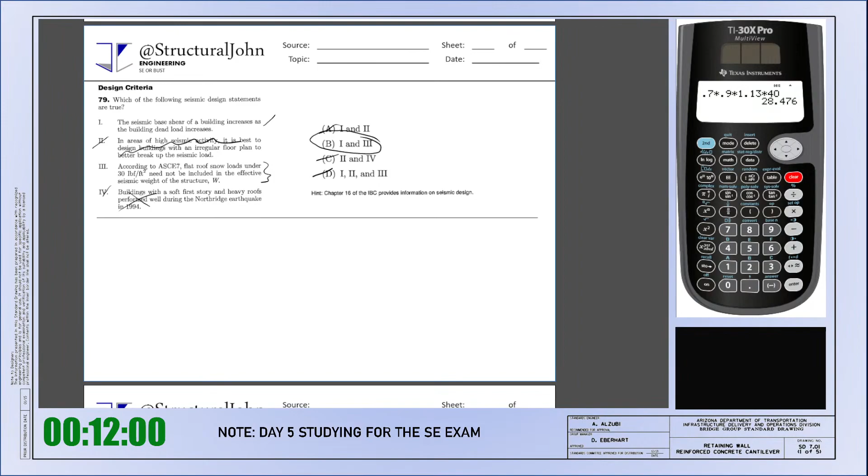We got 2 problems today. I already finished them, I think it was Friday, and today we're gonna go through them and see what I did wrong. And I most likely did something wrong.

Sebastian will not be joining us. That's my cat. He is currently taking a nap. All right.

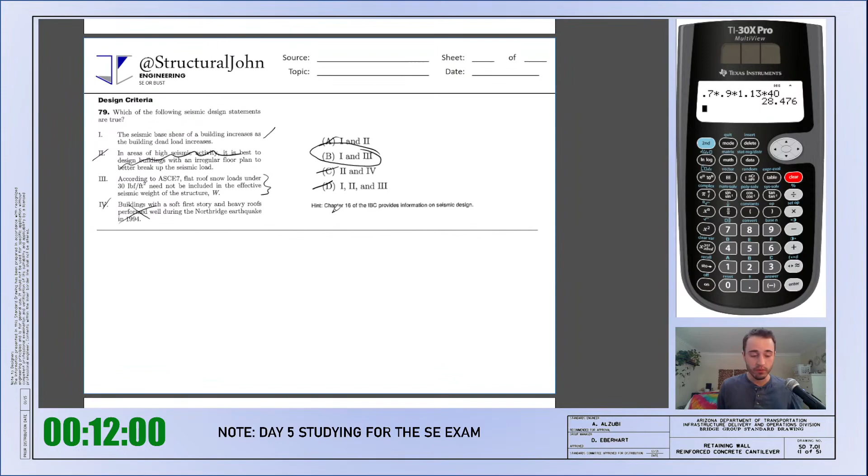Zoom in. Number 79, it says, which of the following seismic design statements are true? The seismic base shear of a building increases as the building dead load increases. So I said yes to this one, and I did that because the base shear is equal to Cs times W, and W is the weight of the structure. So I said this one was good.

In areas of high seismic activity, it is best to design buildings with an irregular floor plan to better break up the seismic load. So I said no to this. Because if you're following ASCE, this is a bad thing. You get penalized for this. So that's why I said this one doesn't sound true.

Third statement, according to ASCE 7, flat roof snow loads under 30 pounds per square foot need not be included in the effective seismic weight of the structure W. So I don't think I ever checked this one, but we'll see in the solution. I said that that was true. Not quite sure.

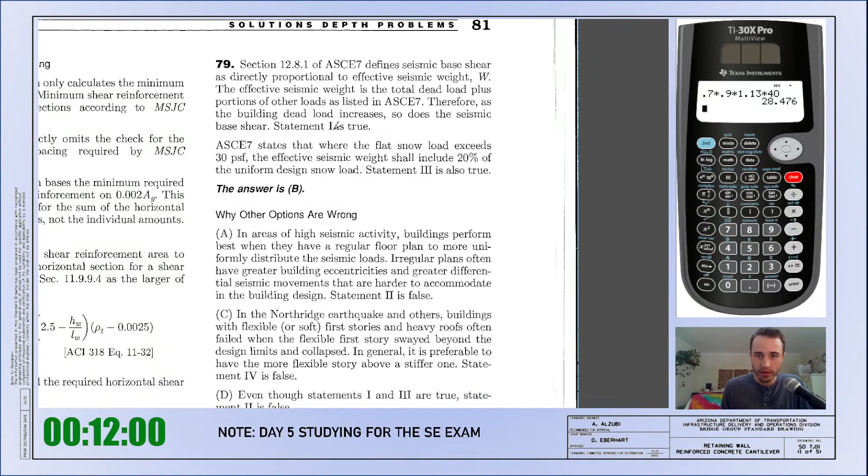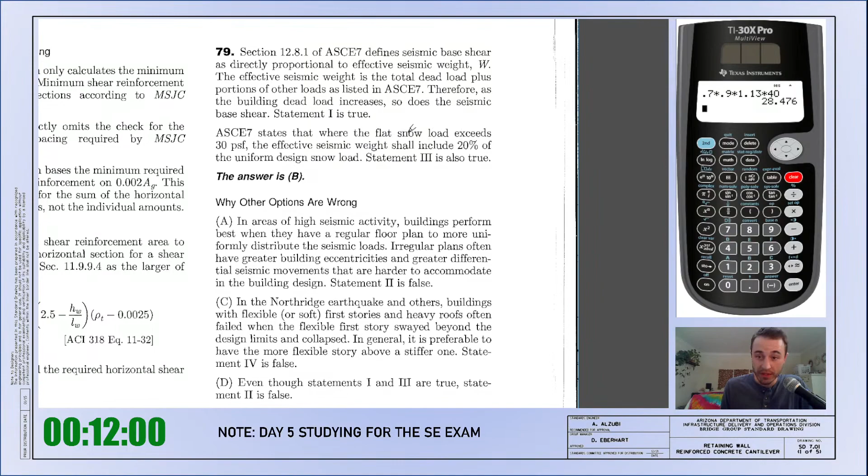All right. So solution to number 79 is B. And that's what I said. So let's see their reasoning. So these sections are probably old, but they confirm what I said on W. ASCE 7 states that where the flat snow load exceeds 30 psf, the effective seismic weight shall include 20% of the uniform design load. Statement 3 is also true.

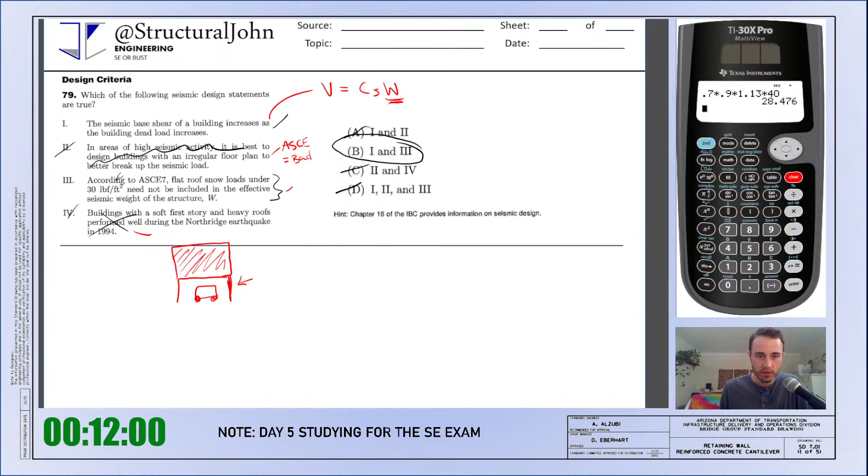Okay, I'm going to try to remember that. The flat snow load exceeds 30 psf. 30. Okay. So I already knew this one right here. I already knew this one. I already knew this one. I did not know this one.

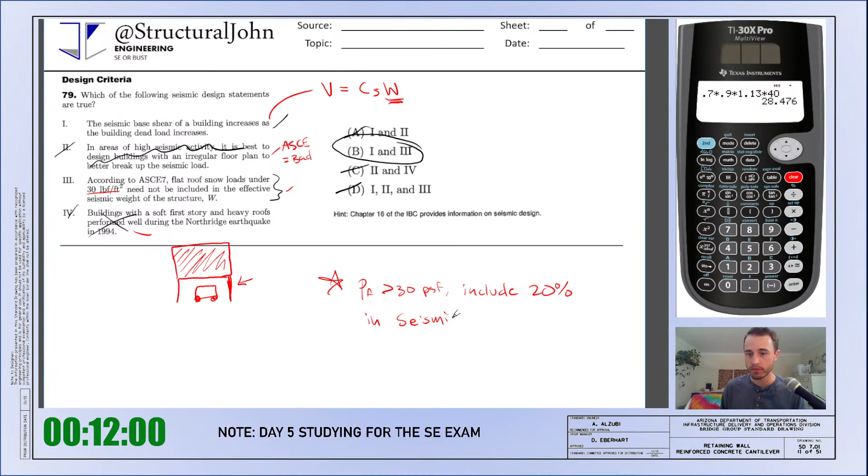So the major takeaway, I'm going to write it here, is that if, I think it's called Pf for flat snow load, is greater than 30 psf, include 20% in seismic weight. All right. Got that one correct.

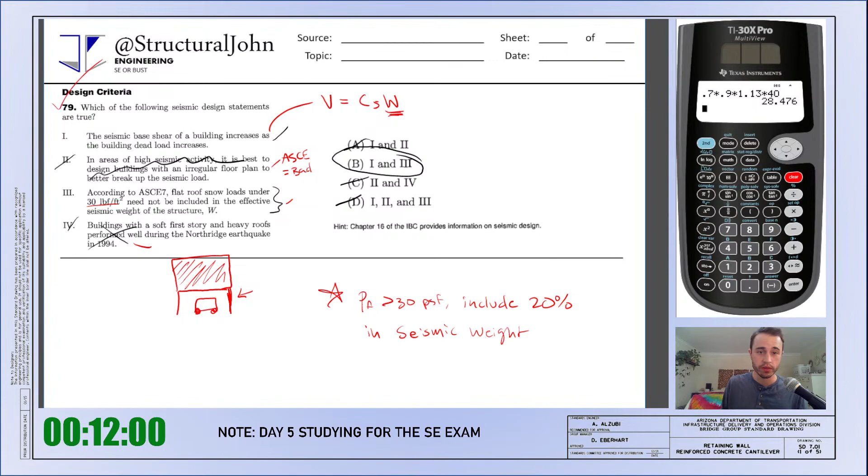I don't think I got this one correct. Okay, so the problem statement. A 2-story office building located in South Dakota, it's an office park, is 40 by 60 feet in plan. The asphalt shingle hip roof has a 6 to 12 pitch and is supported by rafters spanning the short direction of the building. The attic is vented and insulated with R30 insulation.

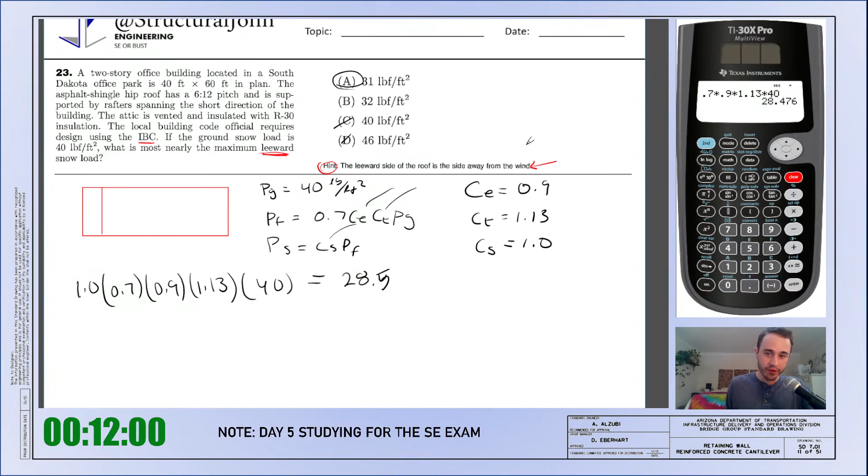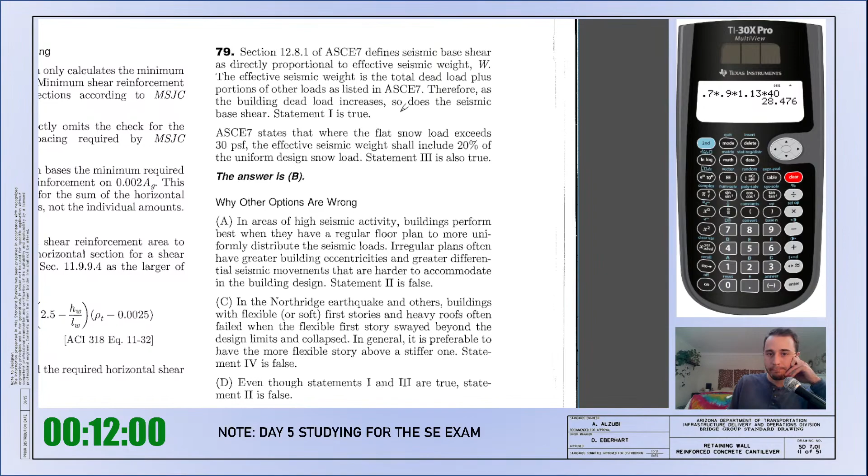The leeward side of the roof, okay, obviously. The leeward side of the roof is the side away from the wind. Don't know that? You should know that now. Memorize that. It's not that hard though, because the opposite is the windward side, so it's kind of in the name. All right, let's see where I messed up. It's probably this windward versus leeward thing. Wait, what problem? 23.

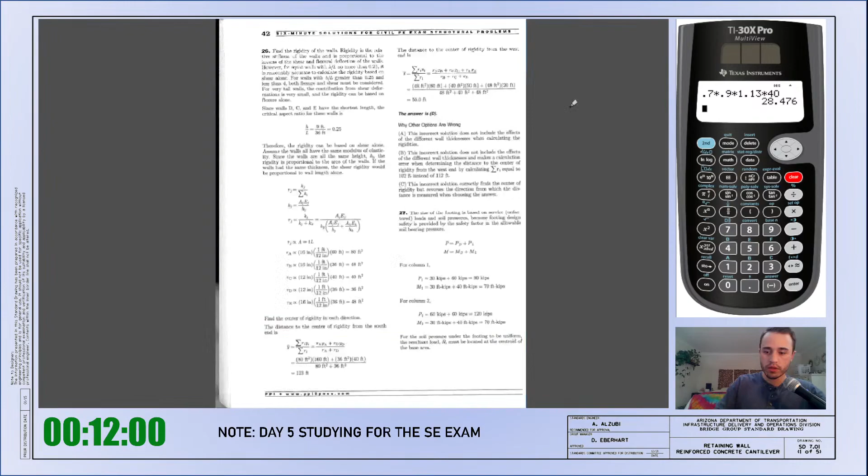Oh my God, 23. Cool.

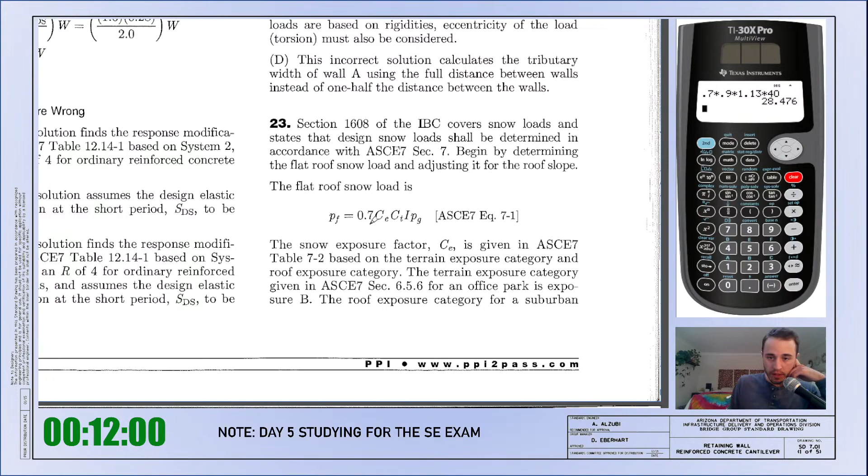All right. So we got this part right. Flat roof snow load is this. The snow exposure factor Ce. Ce is 1. What did we say? So we got this one wrong. The roof exposure category for suburban location can be assumed to be partially exposed. Based on these factors, CE is 1. What does that mean?

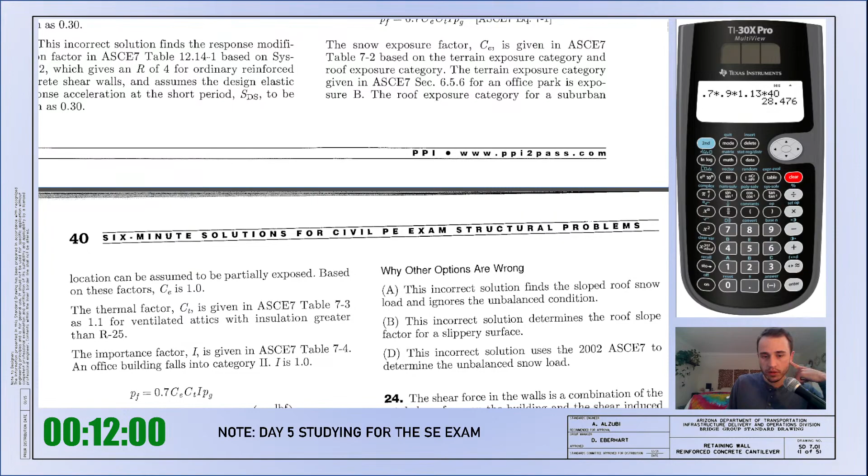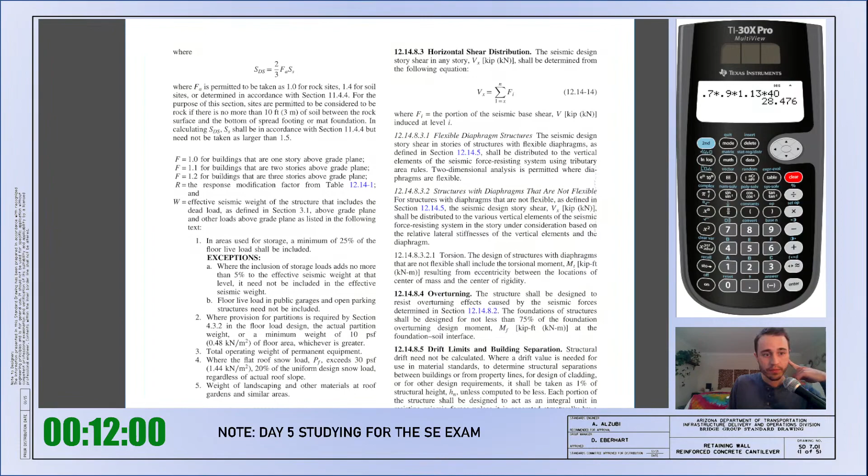All right, let's take a look at ASCE and see why we got that wrong. Maybe it's because I'm using ASCE instead of IBC. Chapter 7. Okay. Table 7.3-1. Okay, I think I said it was surface roughness of category B. Yeah, so it's B. And then they said it's partially exposed.

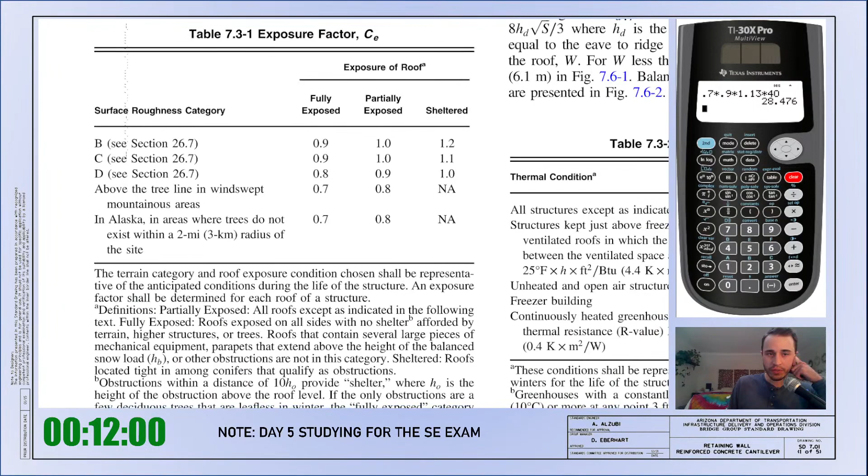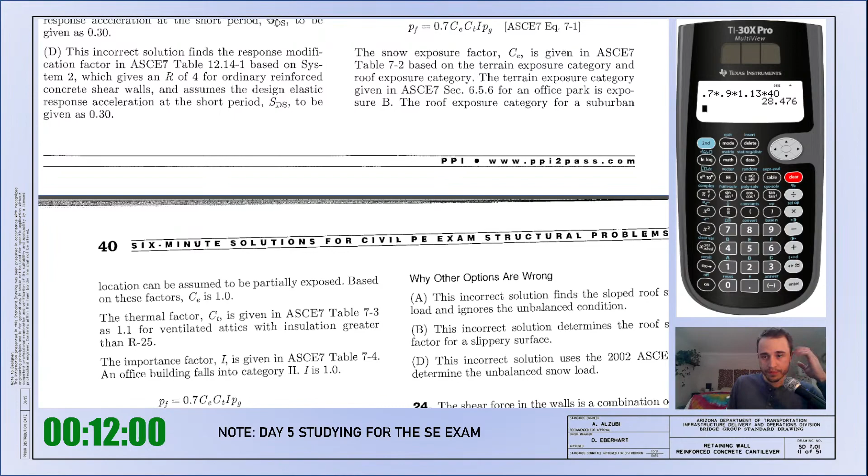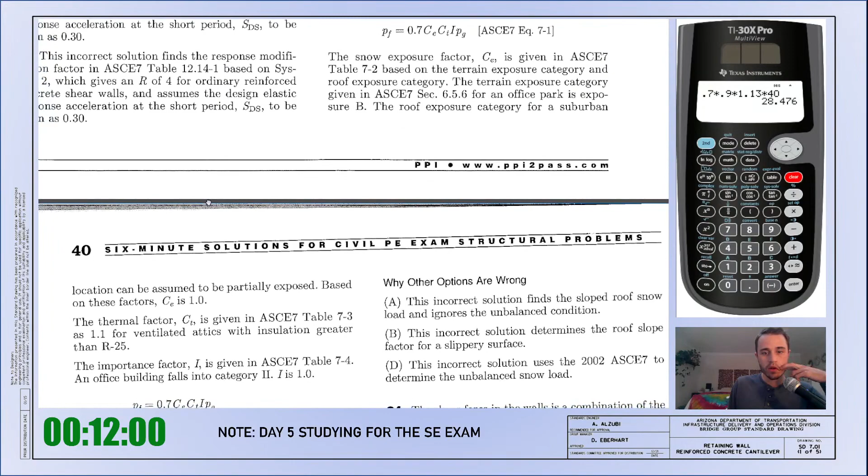I was saying that it's fully exposed. Whatever. I guess it's partially exposed. Okay. Roof exposure category. Partially exposed. How are you supposed to tell? All roofs except as indicated in the following text. That's helpful.

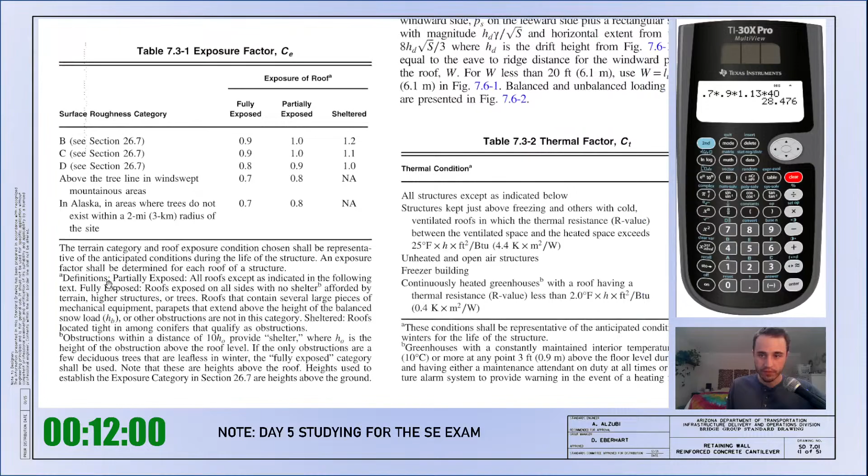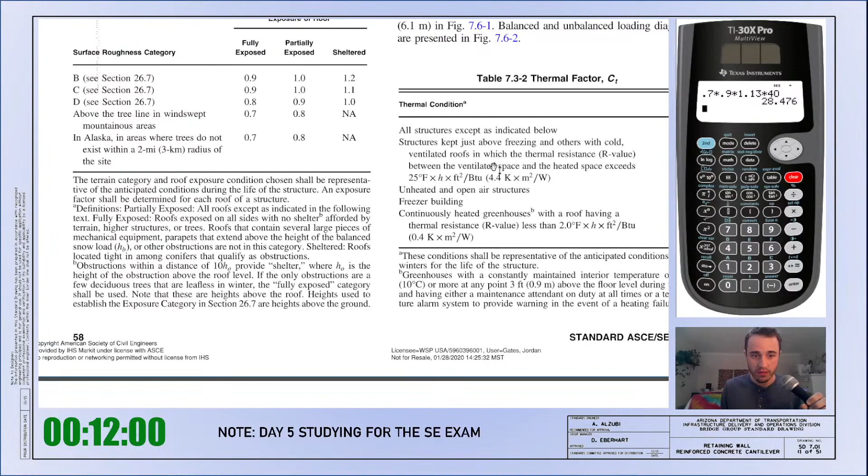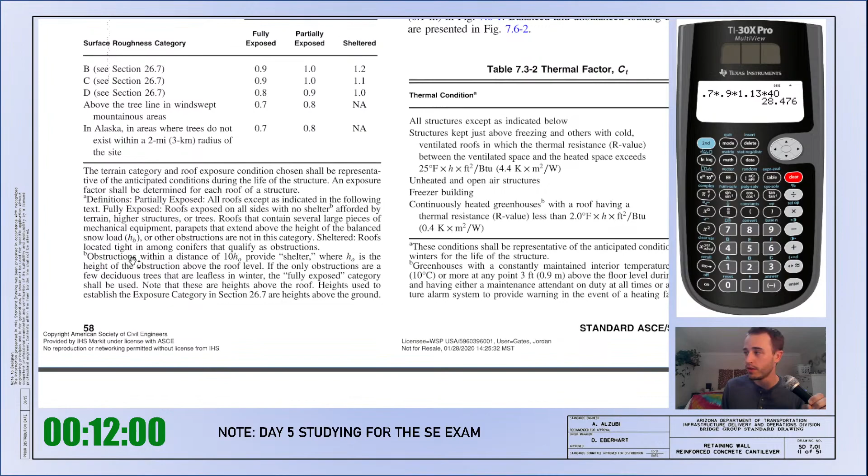Roofs fully exposed. Roofs exposed on all sides with no shelter. B. What is B? Where are the footnotes? Give me the footnotes. All right. Oh, it's the same thing. Obstructions within a distance of 10 H0 provide shelter where H0 is the height. So, I don't know. To me, it's not partially exposed. A terrain.

I guess we'll just have to say key point here is, make this red. All right, key point. Suburban equals partially exposed. All right. Let's see if we got CT correct.

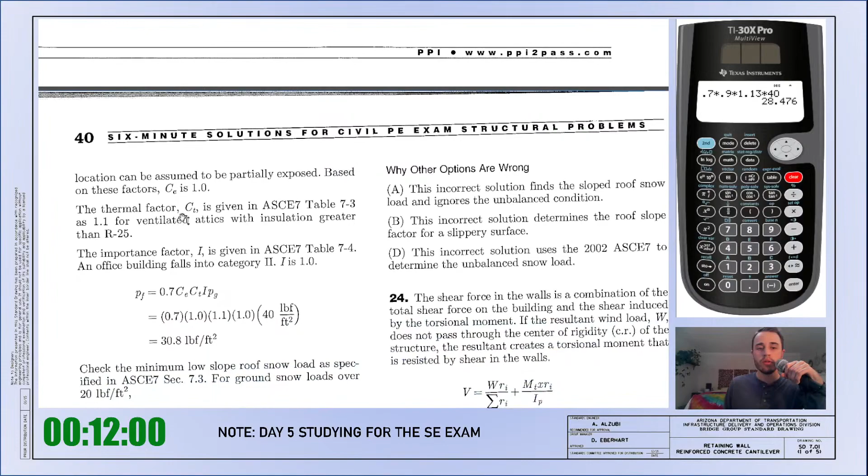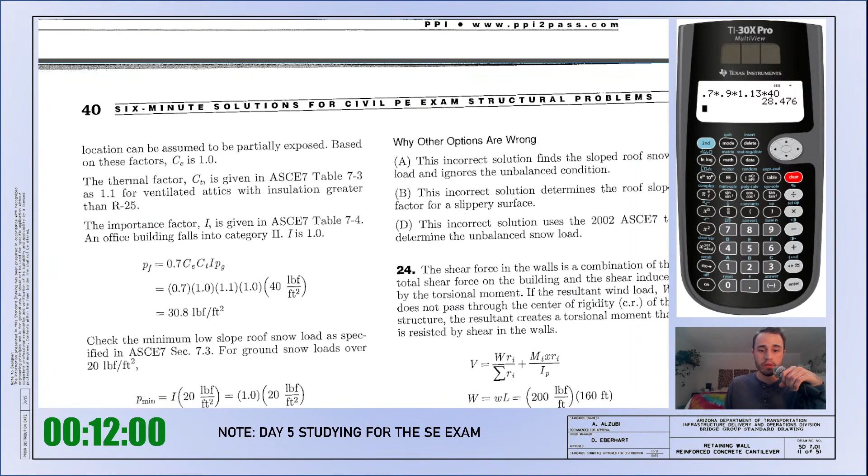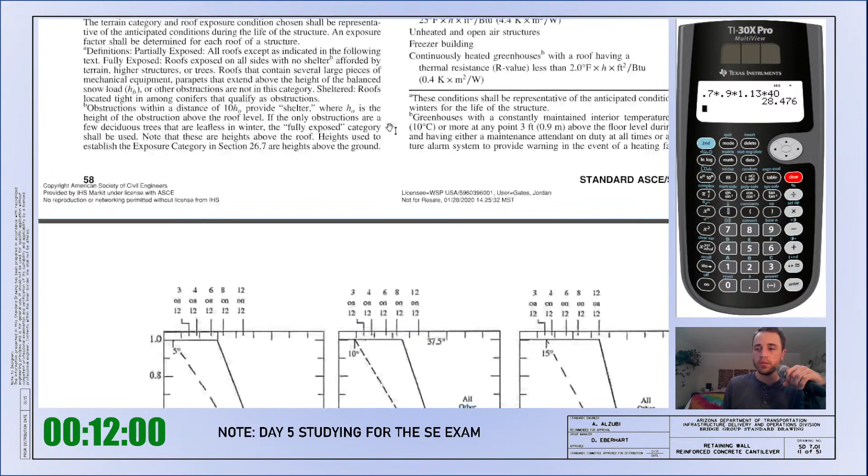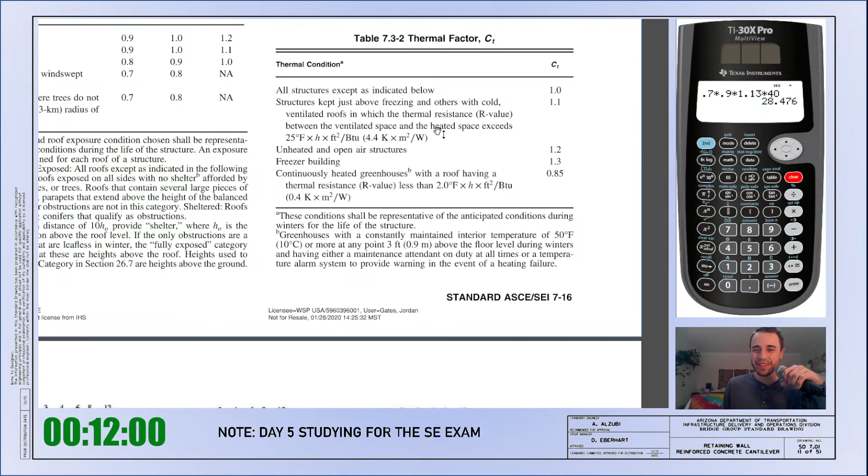CT. The thermal factor CT is given in ASCE 7 table 7.3. 1.1 for ventilated attics with insulation greater than R25. Yeah, I mean, we essentially got that correct. Where did the 1.3 come from for me? Oh, I was using the wrong table. That's what it was.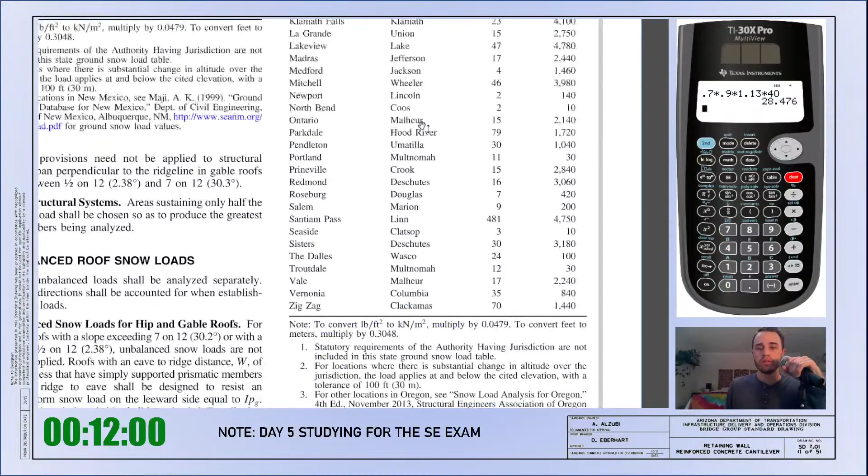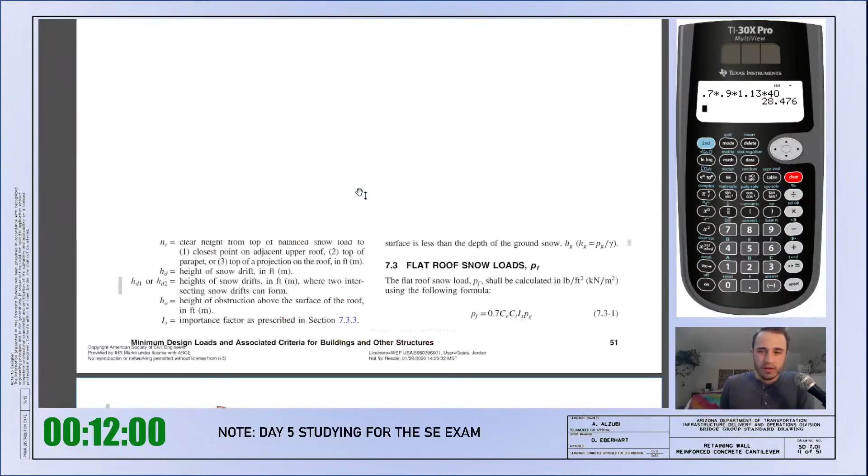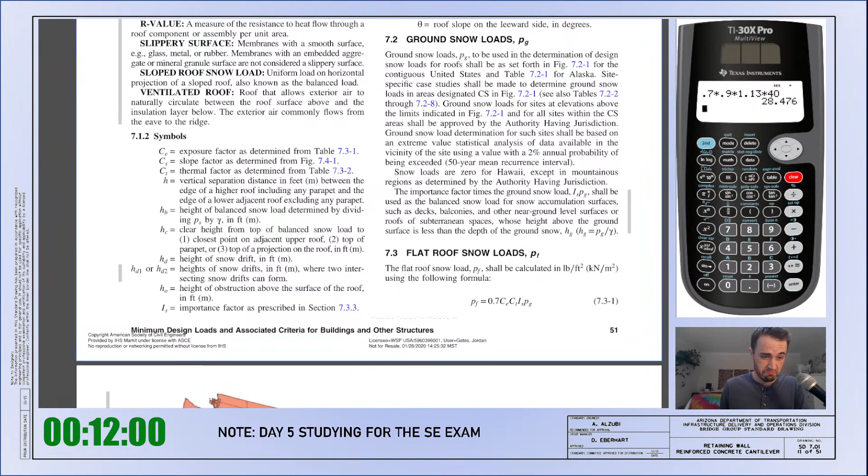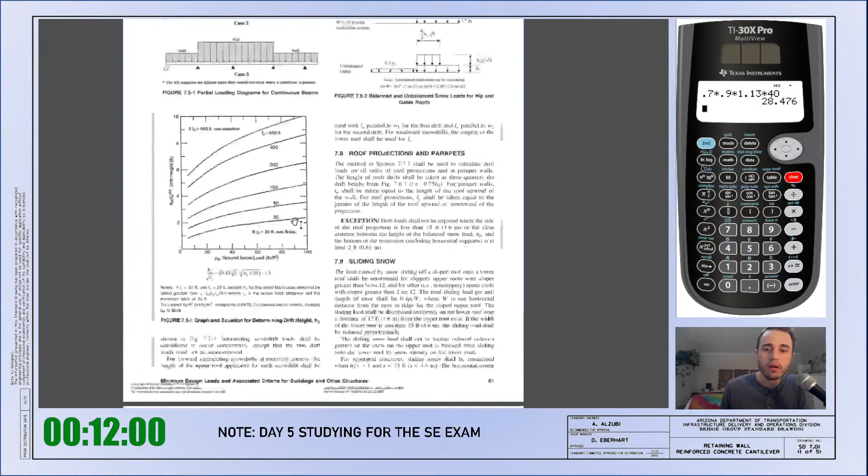What table was I using? I remember seeing it. It was like a table that had the R factors in there, the ventilation factors. CT, table 7.3-2. What was I using? Okay. Well, I definitely did that wrong.

Structures kept just above freezing, and others with cold ventilated roofs in which the thermal resistance R value exceeds 25, so we had an R value of 30. So I got that wrong. Wrong table. Wrong exposure. All right. 2 for 3. Let's see what CS is.

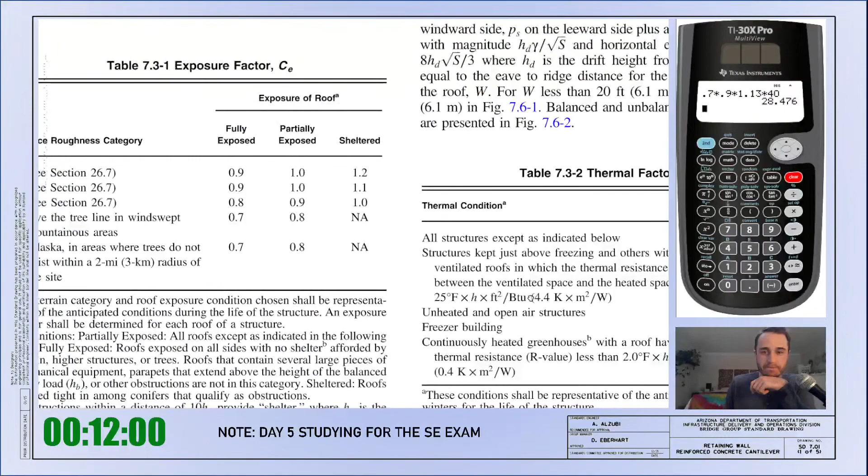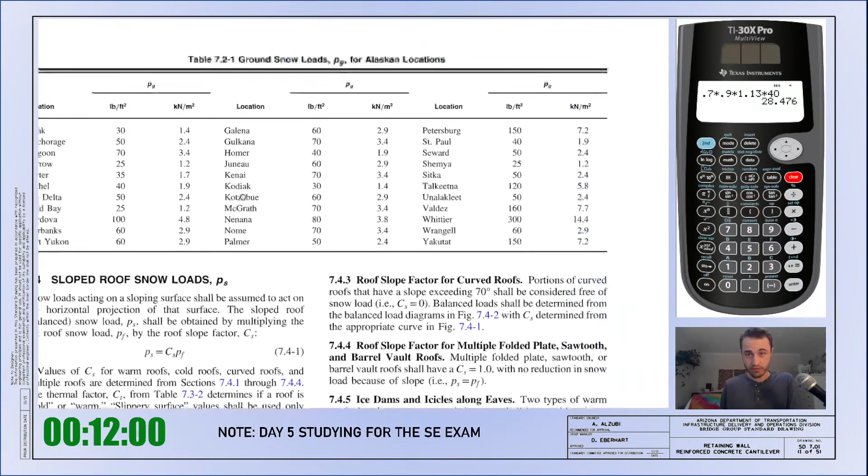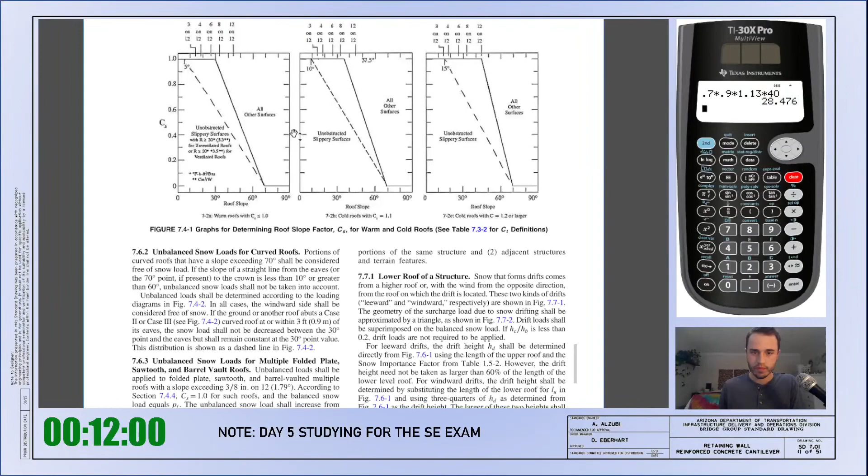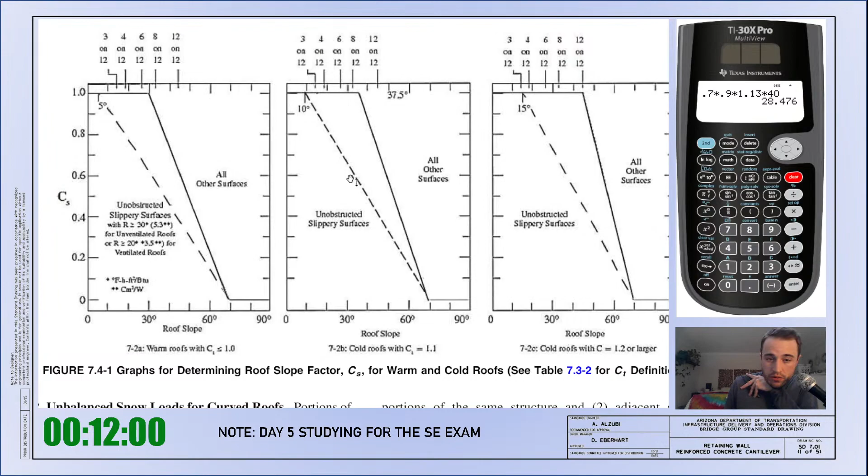All right, CS figure 7.4-1. Warm roofs, cold roofs. Okay, so we're cold roof. I think we were 6 on 12. Six on 12. Oh, what's the dashed line? Anybody know what the dashed line is? Say it's 1. Let's see what they say. CT, thermal factor, CT.

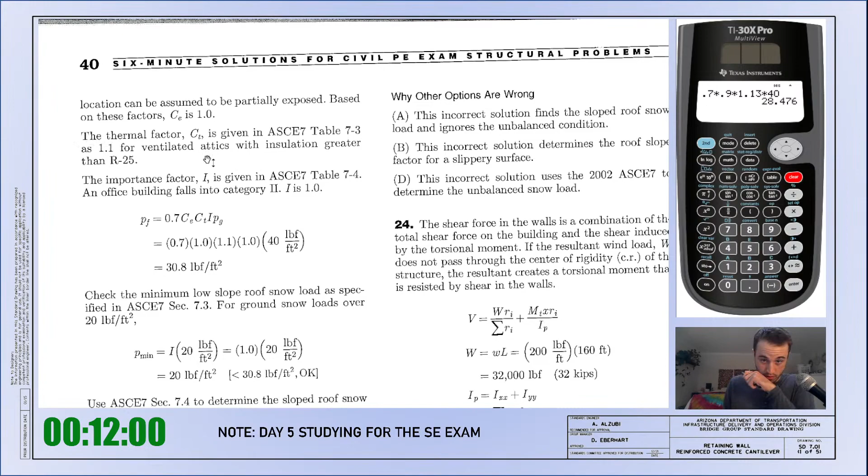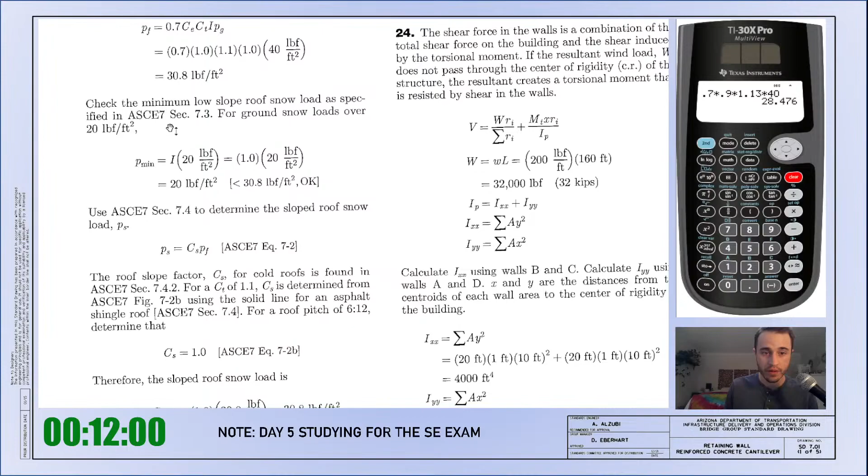We're looking for C. Wait, did I use the wrong equation too? So they have 0.7 CE, CT, I, PG. Where's the CS? Okay, office buildings are category 2. I think in the new ASCE for snow, they don't use importance categories or importance factors anymore, so ignore that. So they get 30.8 for PF. I didn't check the minimum.

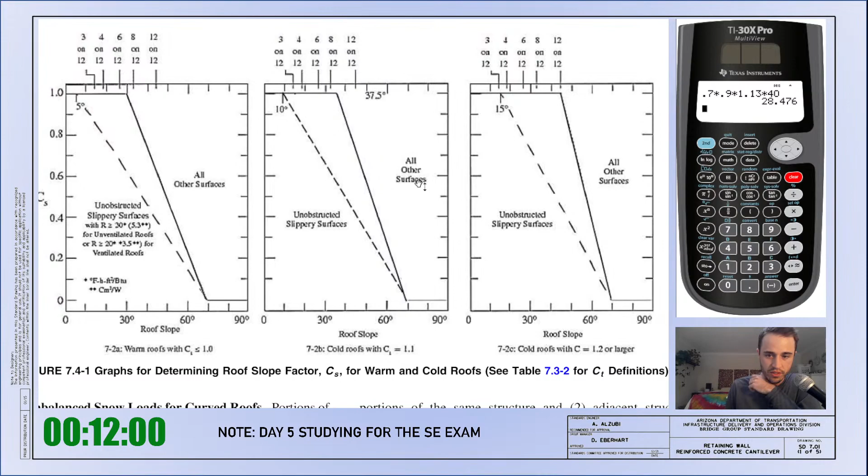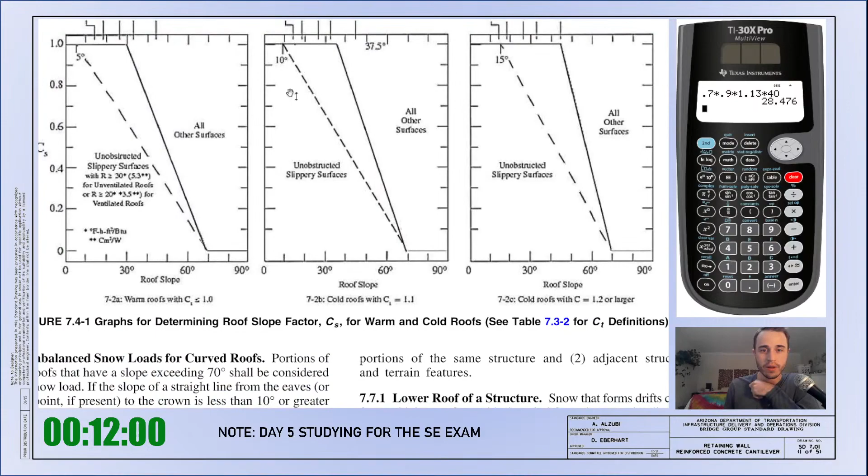Okay, here. They explain the solid line. So for cold roofs, found in the CT of 1.1 graph, CS is determined from 7.2b using the solid line for asphalt shingle roof. I think that's the difference. I think all other surfaces is like asphalt shingle roofs, and then unobstructed slippery surfaces, as vague as that sounds, just means non-asphalt shingle roof, I guess. And then, so I think takeaway number 2 is use the correct table.

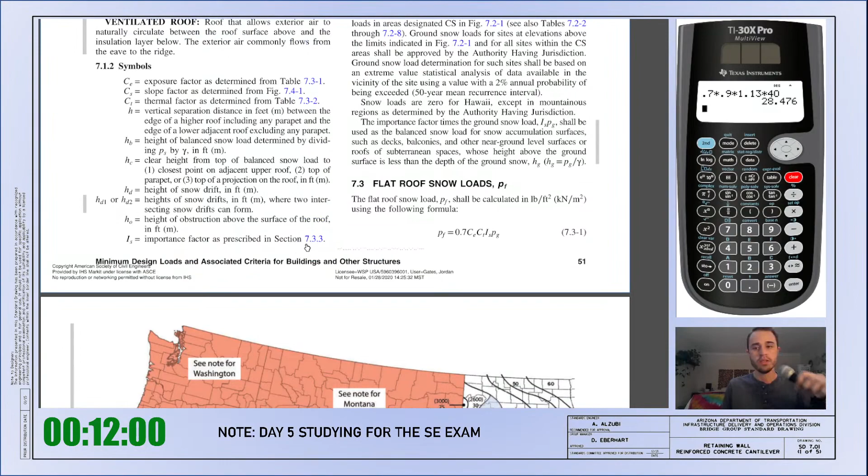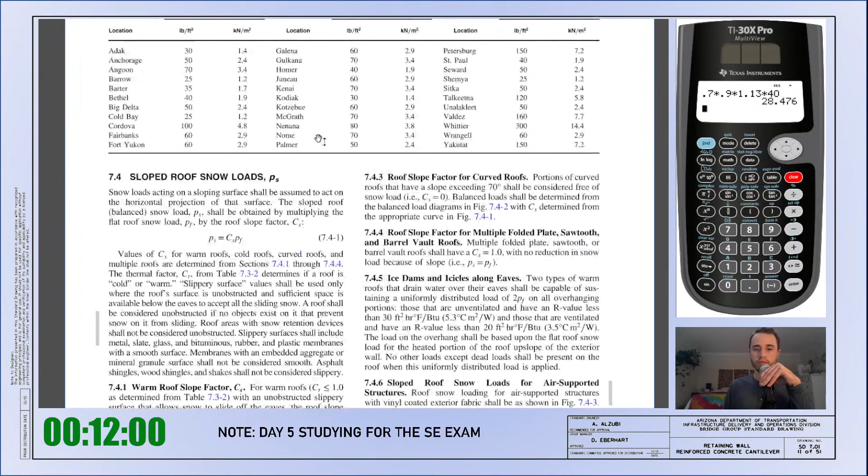Third thing I did wrong was I didn't check the minimum. Let's see. Does ASCE have the minimum here? Minimum snow load for low slope roofs. Okay. Where PG exceeds 20 pounds per square foot.

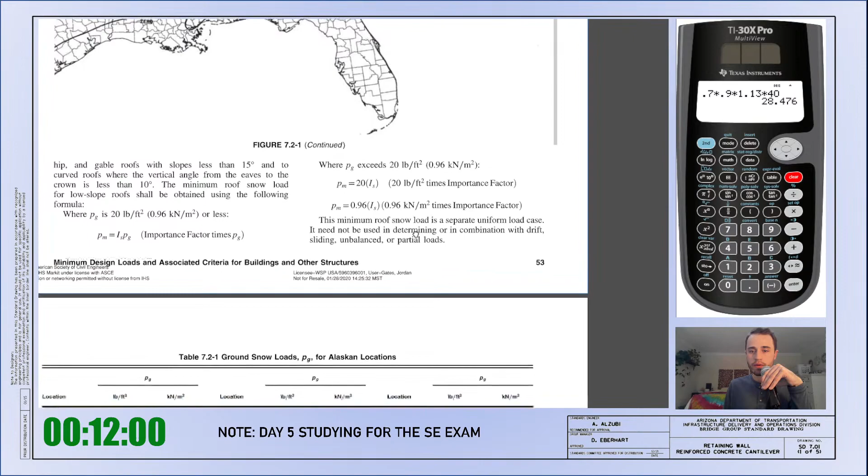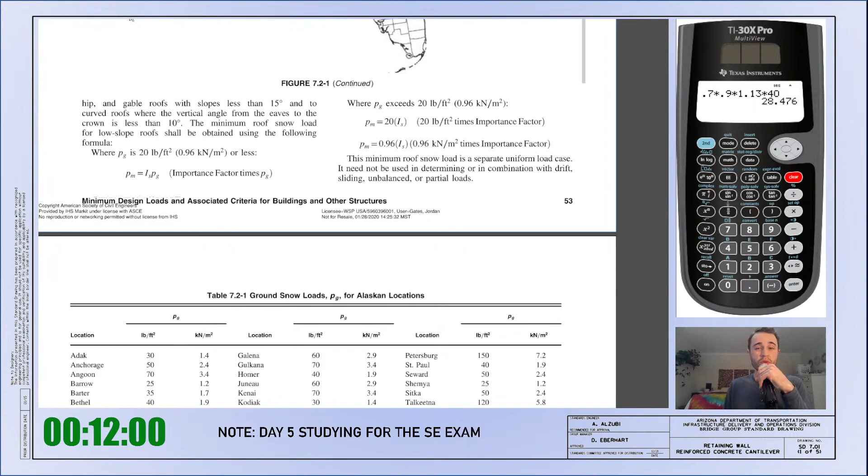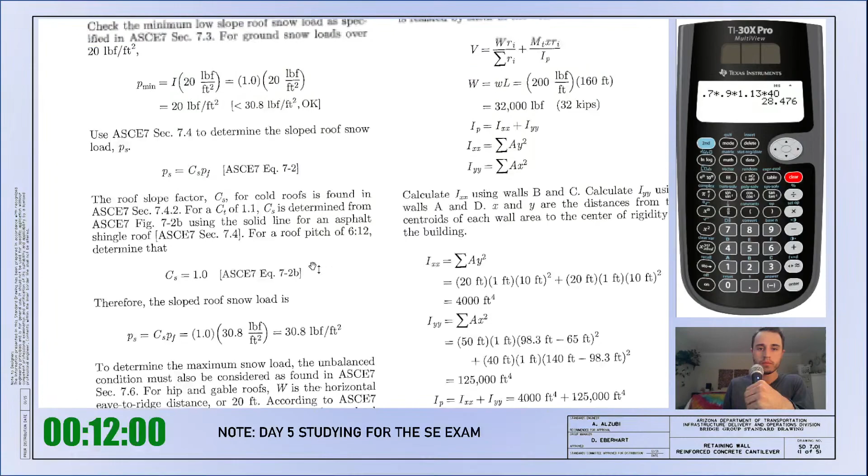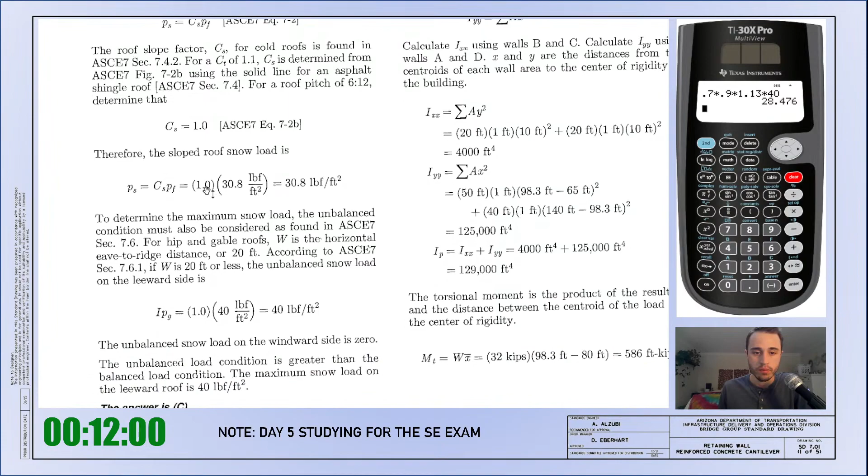Okay, so the importance factor for category 2 is just 1. So the minimum should just be 20 PSF. Is that what they did? Okay. Minimum is 20 PSF. And they multiply by Cs, which is 1. And then, okay, this last part I also did not do.

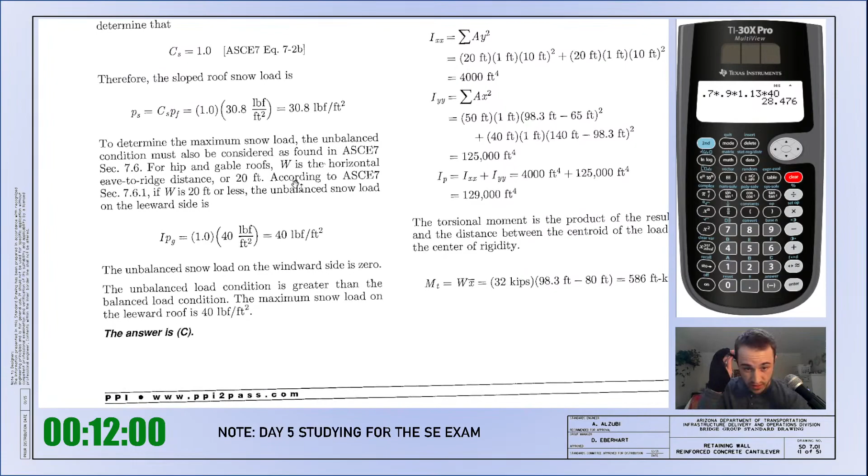To determine the maximum snow load, the unbalanced condition must also be considered as found in ASCE 7 section 7.6. W is the horizontal eave to ridge distance, or 20 feet. According to ASCE 7.6.1, W is 20 feet or less. The unbalanced snow load on the leeward side is blank. I don't know about that. 40.

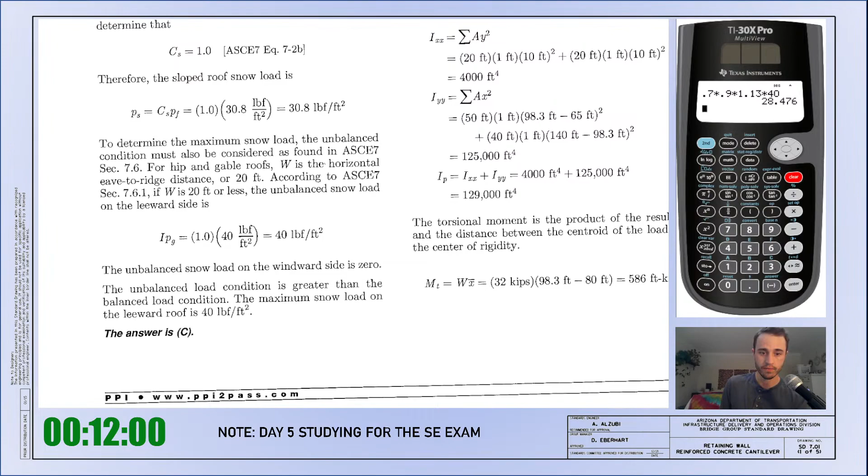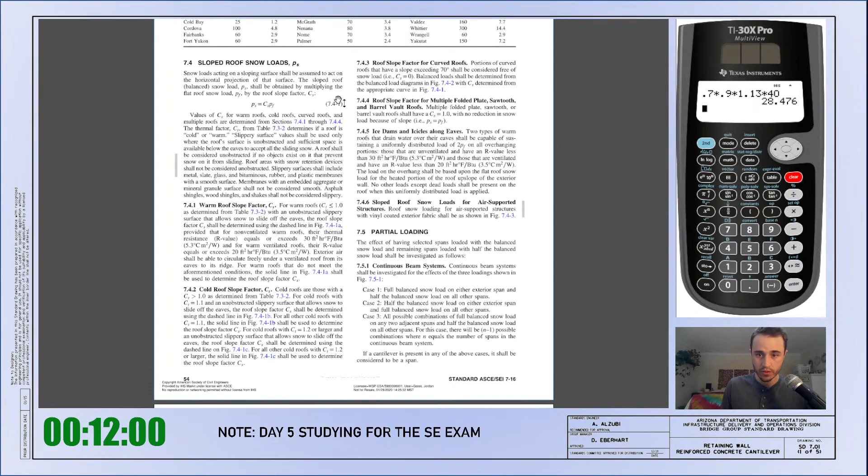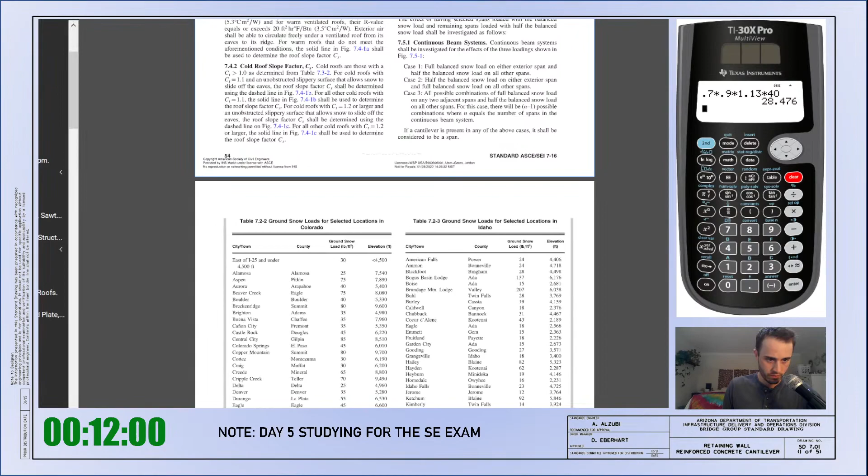Unbalanced. What does that mean? Is it snow load? Partial loading? No. Yeah, I don't know what they're talking about. Minimum. So we've got the minimum. We've got sloped roof snow loads. Warm roof, cold roof.

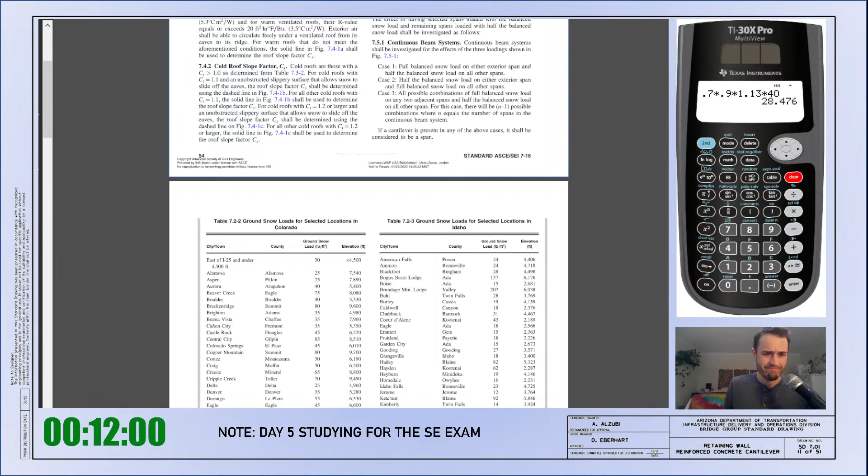Oh, okay. It's the same chapter. Unbalanced roof snow loads. Hip and gable roofs. I think this is a hip and gable roof. This is a lot for a 6-minute question. Hip roof. For a hip roof with a slope exceeding 7 on 12 or a slope less than half on 12.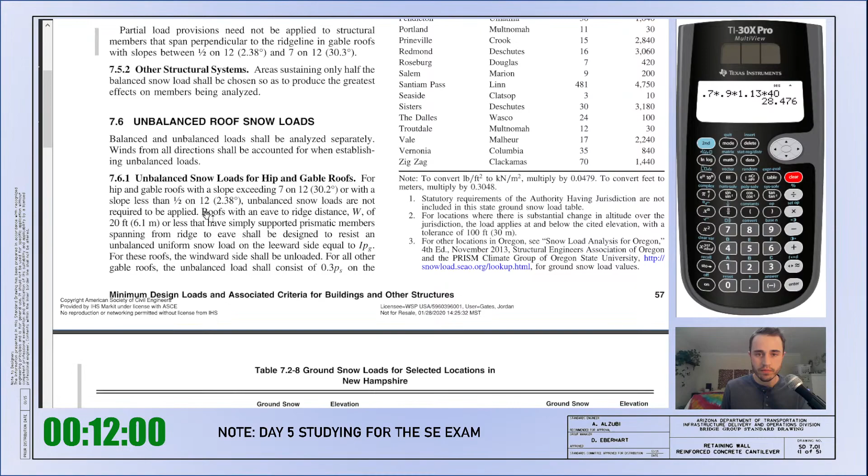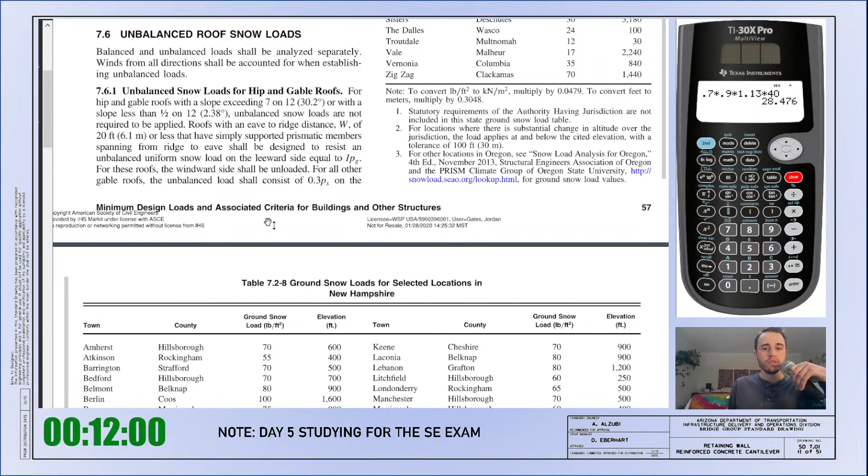Okay. Roofs with an eave to ridge distance W of 20 feet or less. Is that what we have? 20 feet. Are not required to be applied. Wait, oh. Simply supported prismatic members spanning ridge to eave shall be designed to resist the unbalanced uniform snow load on the leeward side equal to I·pg for these roofs. The windward shall be unloaded.

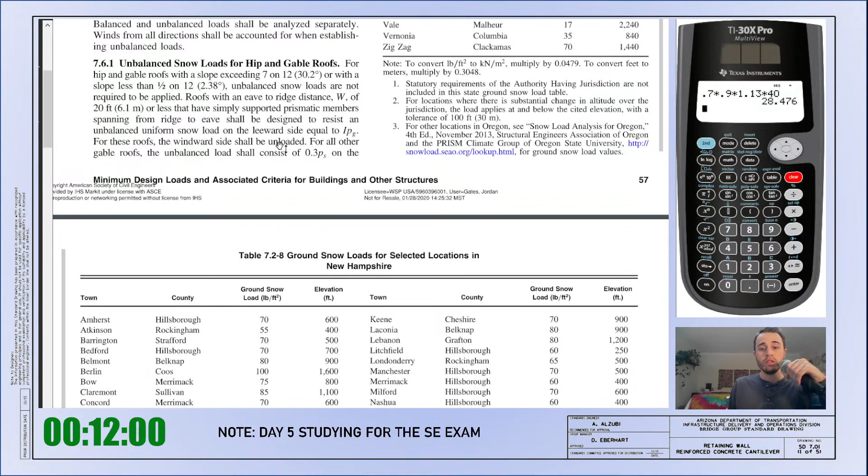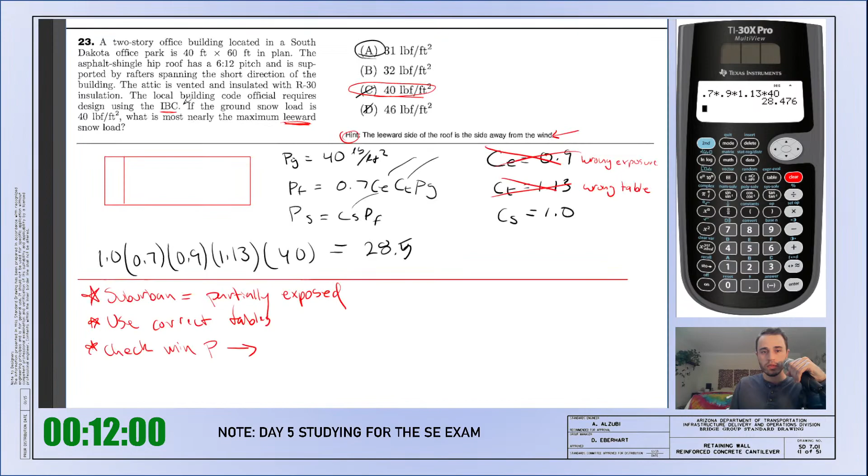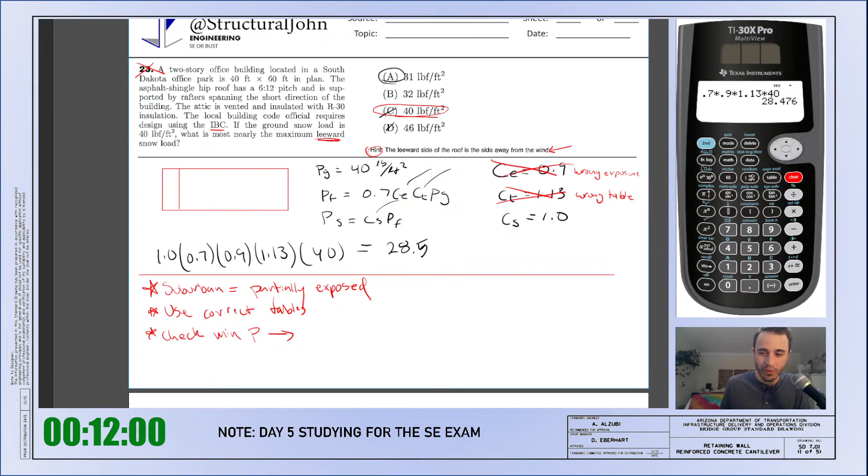Okay. So our pg is 40, our I is 1, so it just becomes 40 on the leeward side. It becomes option C. Boom. All right. I got that one wrong. That is the end of this set. I think we got like one problem correct. So we got that one right. Or sorry, wrong. We got this one right.

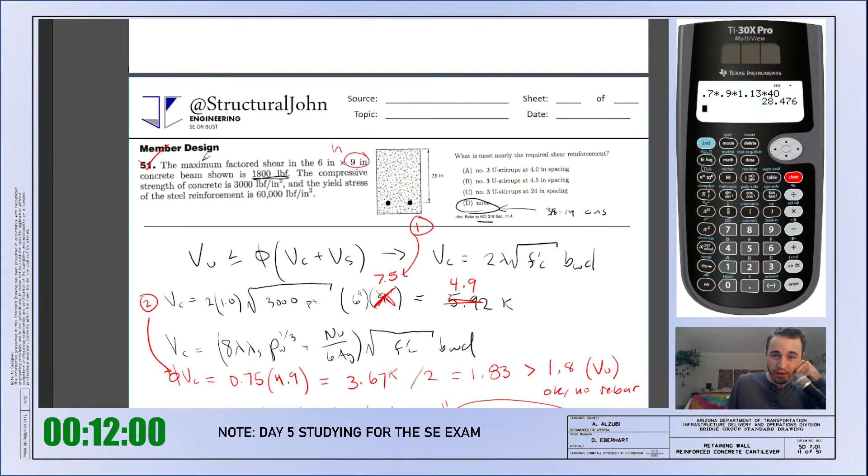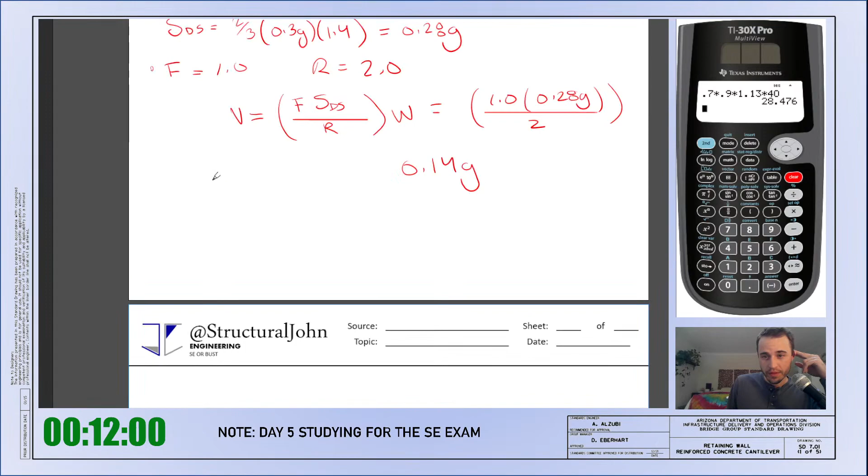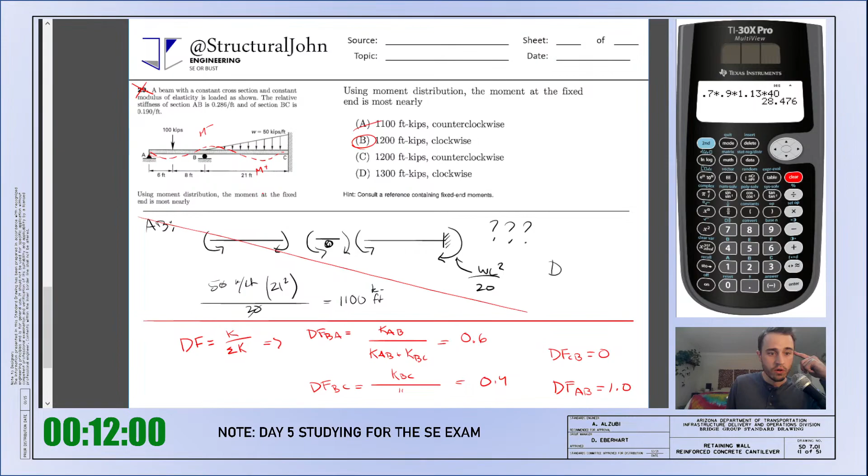This one from a few days ago, I got it correct, but I did it wrong. So I'm gonna say ultimately that's a 0. So I got 1 out of 3. This one for sure I did wrong. So that's a 1 out of 4. And this one I did wrong. So, final thoughts. Final score. 1 out of 5. Right? 1, 2, 3, 4, 5. 1 out of 5. Wonderful. 20%.

Well, we're starting off on a high note with studying for the SE. I'm going to make a new set, probably from the same source. But this source is all sorts of different types of questions. Everything structural, focusing on the depth for PE problems. Work my way up towards SE problems. I've got some SE material already. And I think when I actually start getting good scores on the PE stuff, then we can move to the SE. But so far, I don't see a huge benefit or really a huge urge to move towards the SE stuff, especially because they're changing the format of the SE.

It's going from paper to online based. So they're going to come out with some new material. I think NCEES is going to come out with some new practice sets, practice problems. And when they do, after they've gone through their first round of it, they'll put it out, and I'll probably purchase it and do some practice problems on this stream.